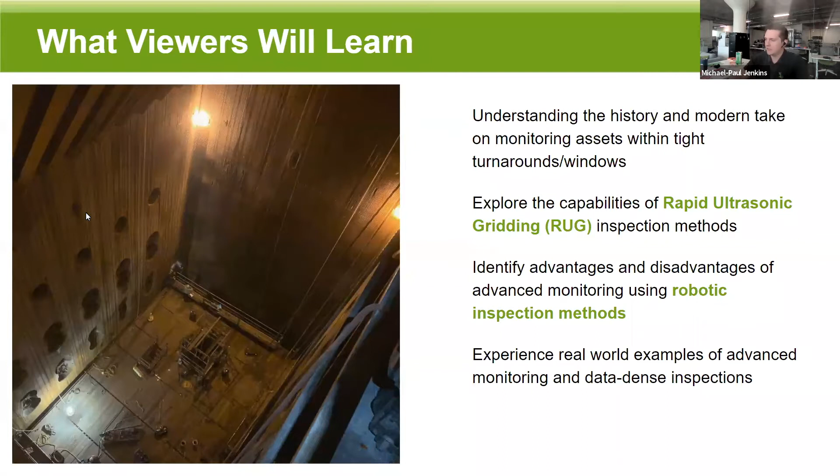But as Sam mentioned, I have a little bit of a logistics background, and to take this time to ask the audience for a history lesson, if anyone was around when this car was around. It was a 1970s Toyota Corona, and that is the real name. I had to look it up. But the 70s played a pivotal role in the history of trade, shipping, and manufacturing. In this decade, Toyota revolutionized the manufacturing world with the wide adoption of its just-in-time, or JIT, production planning process.

In essence, that represents operating with low inventory levels, where raw materials, goods, or even labor are scheduled to arrive or be replenished exactly when or shortly before they are needed in production. Having this system, Toyota could solve some of their problems associated with keeping high inventory levels, free up a significant amount of capital, and reduce operating costs. It could also minimize storage, service, maintenance, and inventory risk costs as well.

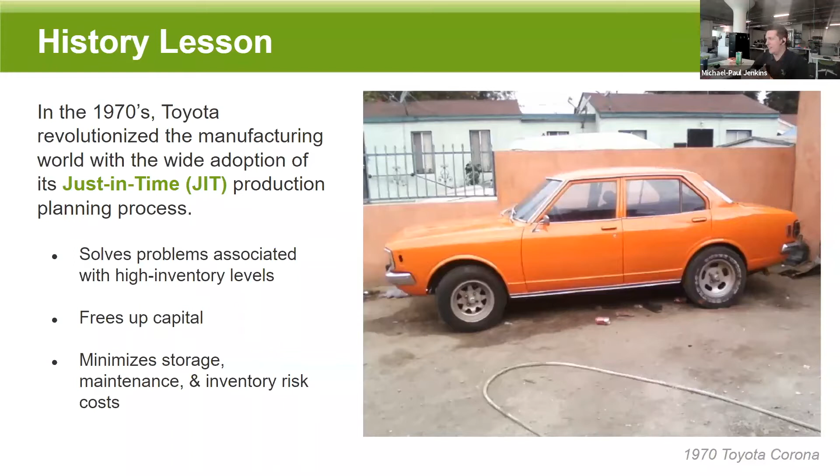You're probably wondering what JIT has to do with NDT or inspection procedures. And in reality, what we're trying to talk about is changing the way inspections are taking place. As technology evolves, procedures and processes need to evolve as well. And so the overlap is, whether it's overproduction, the inventory waste of keeping dead stock, the time spent by workers. You have multiple parallels between the two, where Toyota wanted to make an immediate impact in the market in the United States. They had to adjust their business plan.

And so having robotic inspections, having different types of technologies introduced into the way you all do inspections helps open up new opportunities to save capital, to bend that O&M curve. Something that we hear over and over again is, how do we limit O&M and how do we get back online faster?

So the problem: everyone knows there are known failures, whether it's general thinning or localized corrosion. It's not necessarily uniform. It's sometimes tough to predict or find. Erosion is a rapid deterioration and loss of life expectancy. And some of these vessels, like this scrubber right here, are a massive search area. Thankfully, there are user groups to help identify those known issues, but there still are some unknowns. And major outages in the power industry are going from every year to every 18 months, every 3 years, even some 6-year major outages. So doing this work in a short amount of time often requires a lot of contractors to be on site or cutting scope in order to fit the timing.

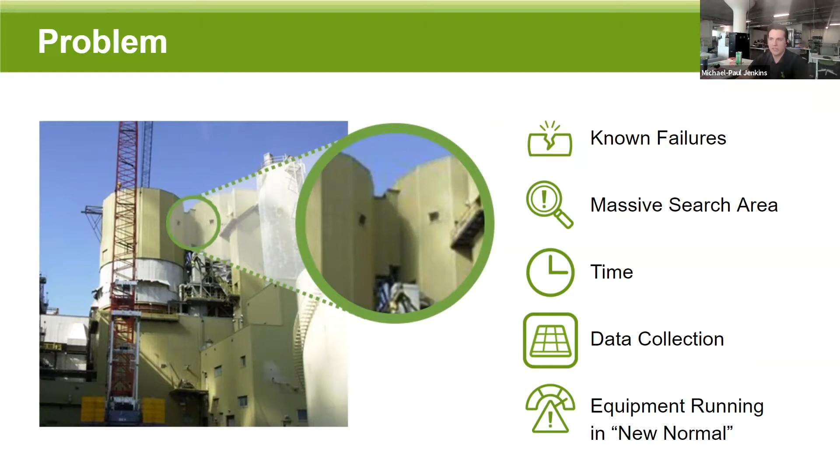Rope access does reduce the need for scaffolding. It's a great resource to send someone down there, get eyes on, feel it, get a little bit of data. The brave men and women that do that, I myself am not one of them. But when you run those spot checks, how do you repeat that? You might have a different operator in the next time. Repeating that is really important, and that's kind of where these technologies come into play.

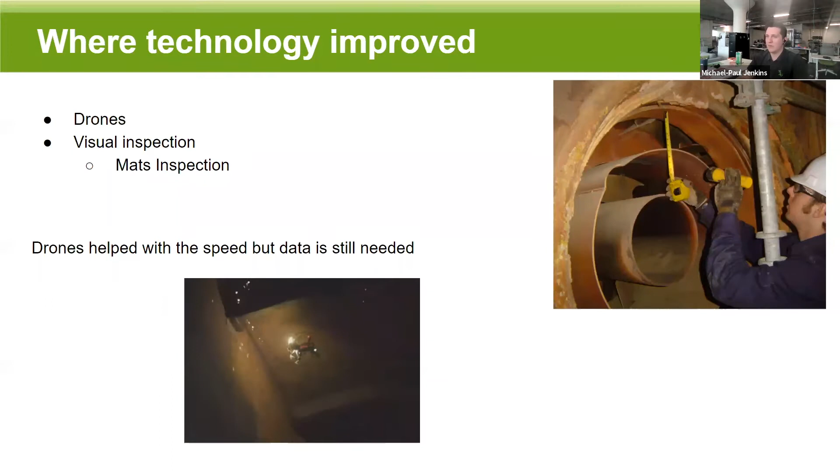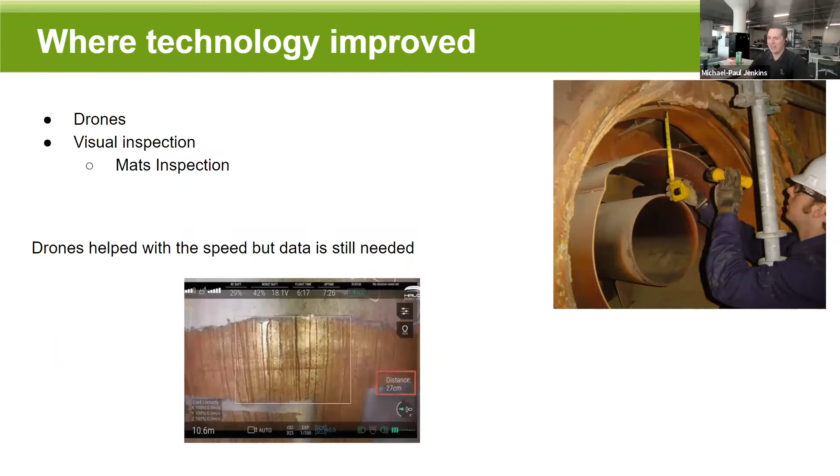Currently, the big hot topic that we come across is drones. So it's a great application for visual inspections. In the power industry, a lot of times you'll have a forced outage, you'll go up and you'll check some superheats, you'll go out there and do maybe a mats inspection. They help with that speed. I myself have seen it firsthand, amazing tools and technology, but sometimes you really need that data. And so that's kind of where the robotic side comes into play.

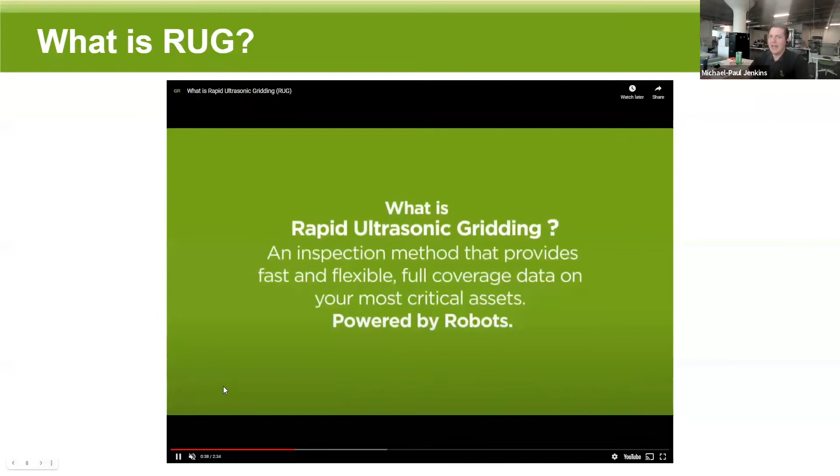For those of you who have not seen these videos in the past, this is just going to go a real highlight of rapid ultrasonic gridding, like I said, RUG. So the traditional methods sometimes can be slow, can be dangerous. Getting what you need in the window you have is a problem sometimes. Scaffolding is a cost associated with that, usually a large cost, and the data that you're provided is usually low in density.

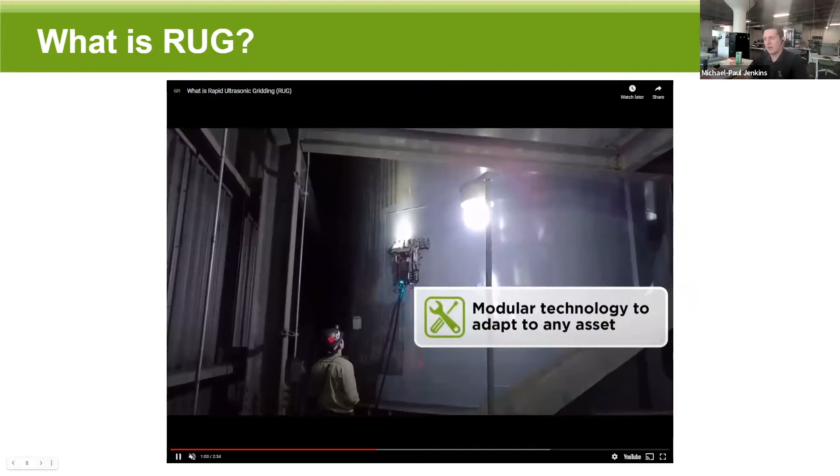RUG basically can do most inspections in one shift, whether it be cones, spheres, tanks in general. And with that comes 2 individuals, 2 NDT techs, and 1 robot. Depending on the setup, you can have little to no scaffolding as well. And you're talking about 1,000 times more data that can be recorded and reviewed down the road. So as I said, 10 times faster, 1,000 times more data.

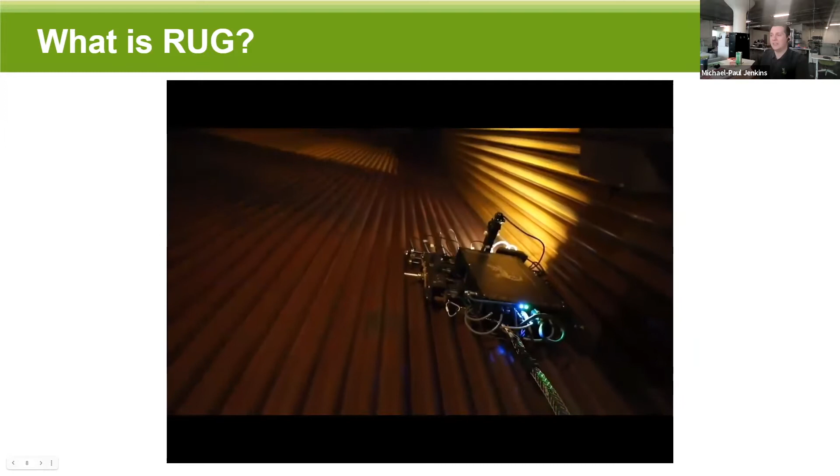Here's some examples of assets we've inspected to give you a little bit of sense of timing. Rapid gives you an idea of the speed. And for those who would be interested in non-confined space entry inspections as well, those technologies are out there, not just with Gecko, but other companies as well.

So again, let's talk about rapid ultrasonic gridding. Like other UT methods, RUG captures that raw A-scan data, which could be presented in a B-scan or a C-scan mode, or used to create a visual representation in those 3D models. However, RUG is capable of capturing multiple A-scan data points at a much faster rate than those traditional thickness measuring techniques. As such, the speed of the coverage is greatly increased over methods utilizing a single thickness probe. The spacing between those probes and the frequency of recording varies depending on the amount of thickness data that's needed.

And I threw a lot of terms out there: A-scan, B-scan, C-scan. There's probably other scans out there too. A-scan, think of it as a signature of sound, right? A thickness value associated with that. B-scan is viewing those A-scans across the run or distance. So in this visual off to my right, this is the B-scan that comes with the inspection. You can see as we go to the right, thicknesses come down, dip down, come back up.

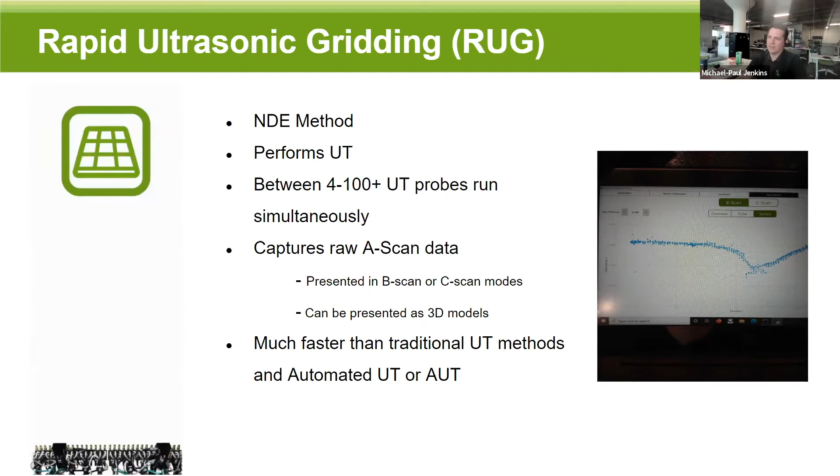So right there, the operators know that there's a potential issue, and you can either go back and validate that by hand, or you can validate that back in the office and give you the final C-scan report, which is what you would see with the robot on the left. But all that goes through a 3-step validation process. So there's ASNT level 2s, level 3s, procedures are written.

Robots, while they're useful, reliable, and safe, they still need humans to operate and maintain, from calibrating transducers, validating those readings, as well as writing those reports. The robots are a tool. Granted, they're a really impressive and helpful tool, but still a tool. You can buy some tools.

You can also rent these tools, lease them, or you can hire a service company to use their tools, something like Gecko. While it would be nice to just throw the robot on your boiler, tank, silo, pressure vessel, and come back a few hours later, kind of like a Roomba, you still need good operations teams.

And to talk a little bit more about these pictures, being able to see these A-scans live, being able to audit them, go back and look for context, and then when the data team uploads that, having an interactive approach, a portal, to go in and look a little bit more instead of just a written report.

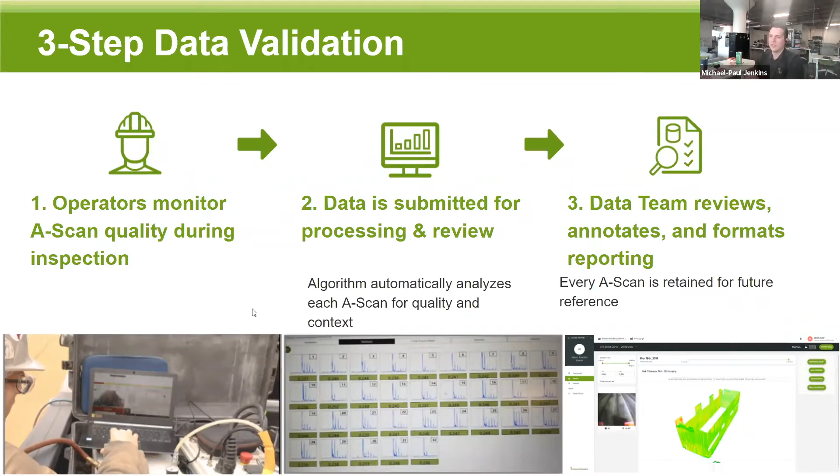So let's talk about those advantages as well. Whether it's delta mapping, fast, adaptable, it gives you peace of mind and less access. Like the cams when you're talking about delta mapping, cams on a scrubber, something that is repeatable. Going back and knowing this object, providing a thickness measurement, something that is going to be reliable and go back

and forth. But you can also do certain things like different assets where in a scrubber, like one of the pictures I showed before, you already know the areas that you should look for, right? That spray zone. So circumferential runs with the robot help find that. Think about how you're inspecting now. Are you able to lay over that data from inspection to inspection that is accurate within a few centimeters? Maybe that's not important, maybe that is important, but are you able to do that in a fast turnaround, right?

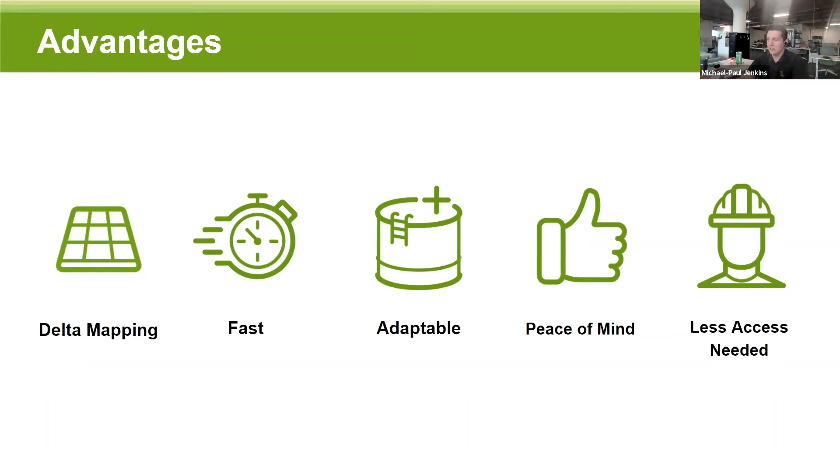The other things to consider are obviously the cleaning that we talked about earlier, the schedules and the budgets. Maybe I can't fit it during this outage, but maybe I'll be offline for a few days. Talk about the cleaning and how we can incorporate technologies. There are companies out there that can do tank inspections, tank cleaning with no human entry, just a robot in there. Not all cleaning companies are created equally, too. There are technologies, different investments in those cleaning spaces that really separate the companies and provide a better service.

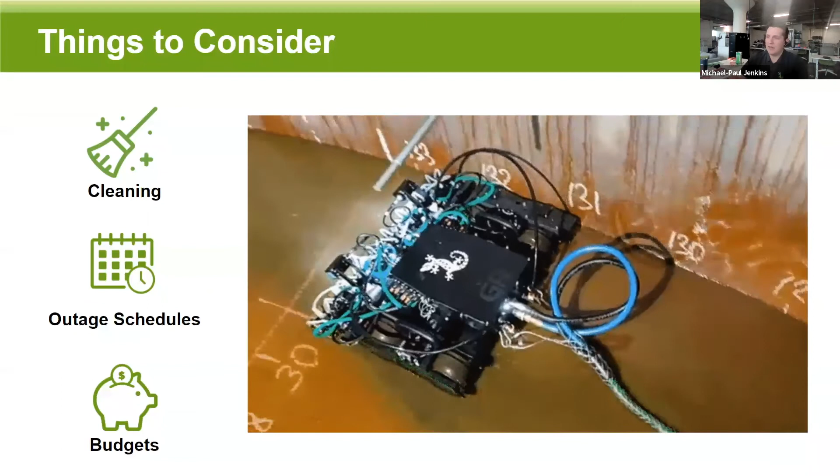Now we're gonna get to the fun stuff, the actual real world examples. We worked on a circulating dry scrubber up in Wyoming, and the customer came to us and said, hey, we know about these concerns. Don't really want to spend a lot of money scaffolding it. And even if so, there's a lot of things to be concerned about where maybe more data density is needed. The problem is we only have a few days to do this. So we worked with them, tried to figure out the best time for when they could come offline, gave them the information for cleaning. And they said, hey, just go in there for 3 days. That's the time we can give you and get as much as possible.

And so we said, hey, we probably could do that with 2 inspectors and 1 robot, and got it done in 3 days. Identified those areas of concern, gave them an idea of where they needed to be at in 5 years and 10 years, and got some feedback from the customer as well. Cleanliness is always a big issue when you're talking about UT, and there were those expectations on how clean it needed to be. But we worked through it and helped them, and we were able to work through getting from the cone to the shell. So letting them know that, hey, there's probably going to be a little bit of access needed. This is where we're going to need to get that.

Maybe your scaffolders can come overnight. And so normally it would probably have taken 2 weeks to do this inspection from the feedback that we got. And to be able to do that in just a few shifts really saved them a lot of time and money.

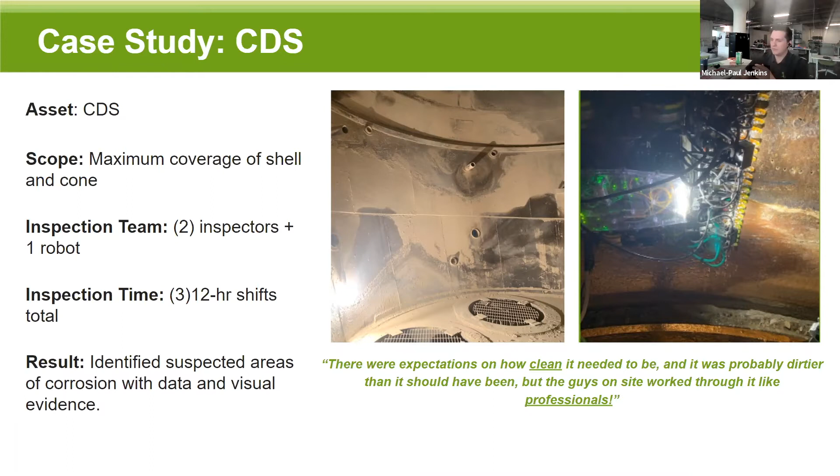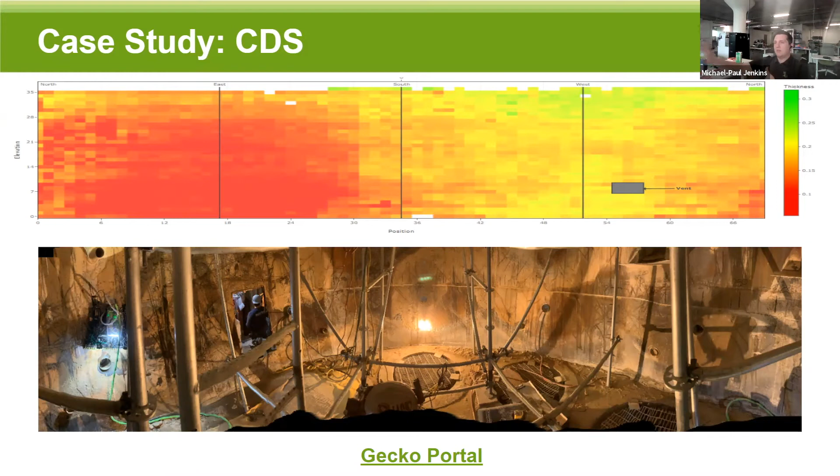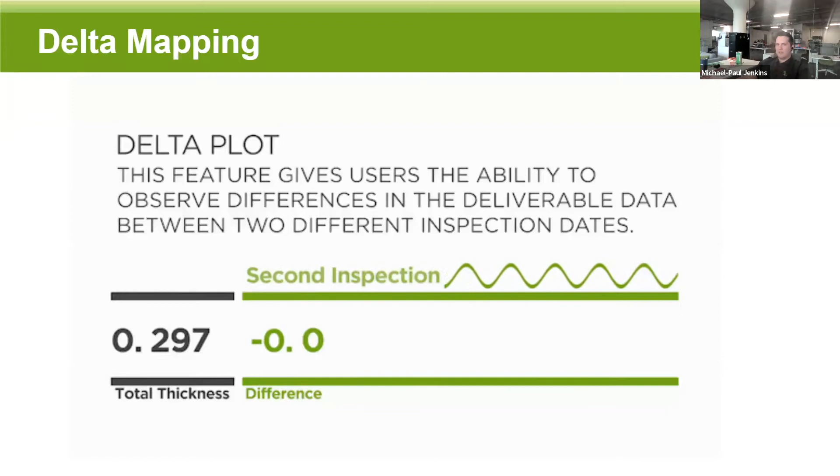This is a little bit more in depth on the delta mapping. This is something that's really important: being able to go back from a first inspection to the next inspection and really monitor those vessels over time in a way that's going to give you the speed and the data that you're looking for.

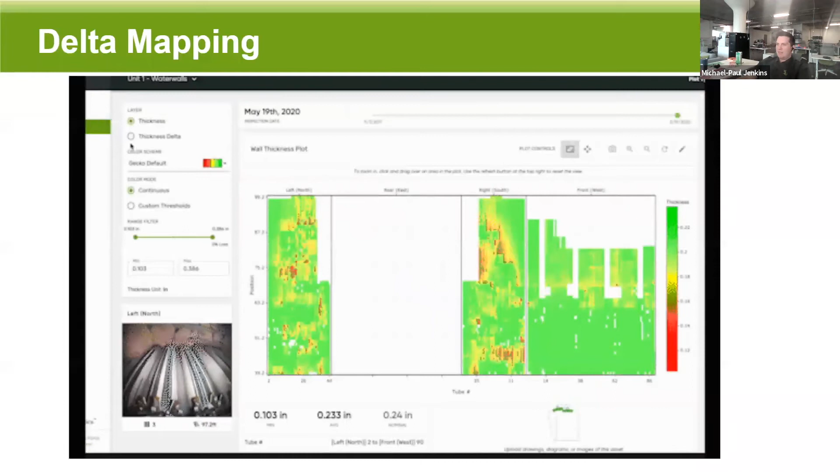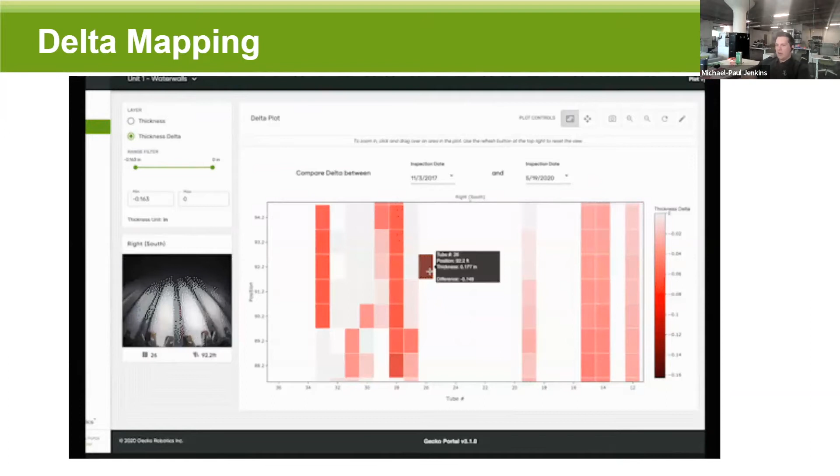And so, as you can see in this, we did an inspection in 2017, came back, did it in 2020. And when you click on that cell, you know exactly what that wall loss looks like, because of that encoder on the robot and those start points, you're accurate within literally centimeters.

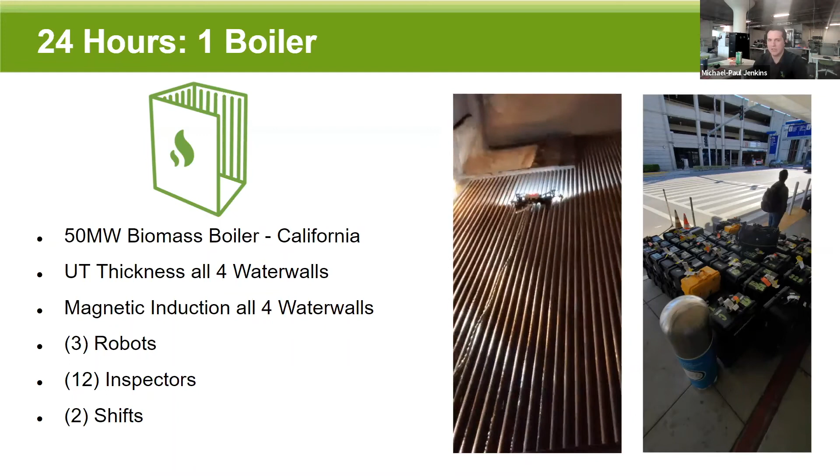For those of you in the boiler industry, I want to highlight some of the advantages of what the robotic inspections can do. So this is a 50 megawatt biomass boiler out in California. They came to us wanting to do UT thickness on all 4 water walls, as well as magnetic induction on all 4 water walls, because there was a lot of metal spray on these boiler tubes, and as a CFB, they're highly prone to erosion.

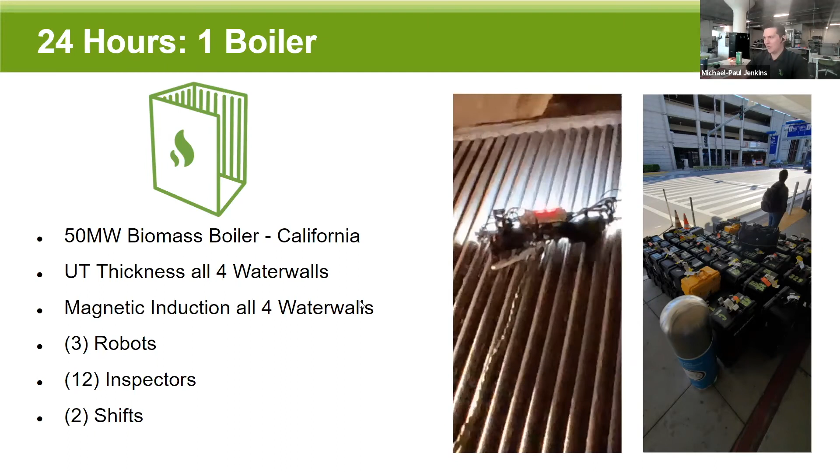And so they came to us, we said we could probably do this with 3 robots, 12 inspectors, 2 shifts working through the night, so being able to get this done in one day. And as you can see on the right, I took this picture when I went out on the job, about $4,000 worth of shipping of Pelican cases, but much to the customer's delight.

We were able to get in there and not only, oh, and I think my thing froze. All right, yeah, there it is.

So get them the information they need and come back and improve that reliability. The issue was that the current outage schedule is already set. Literally every hour of every day was accounted for, and there was a lot of shuffling that was needed. And we're talking about a 10-day outage.

However, they needed to control their spending, and in order to do so, Gecko was able to provide them with a working plan, not just for this year, but years to come. This scan was identified for them to plan better, understand variance in their fuel, take control of the metal spray application, make that 5-year plan, and then to bring us back in the future to help with that Delta map inspection. So we're preventing tube leaks in general, curbing their spend on NDT and maintenance, as well as forced outages.

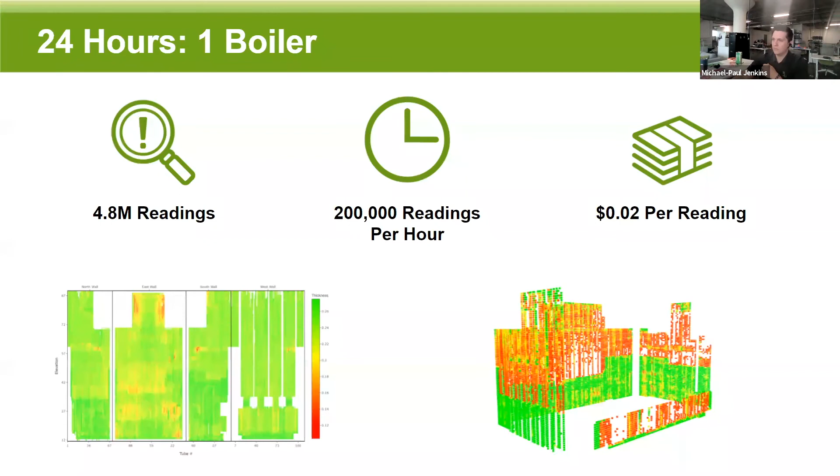This is a fun one too. This is about shifting on a dime. Basically, there was a refinery down south that was doing AUT, and they found some initial readings that caused them concern. Thought they would have to derate this tank. In order to finish this inspection, it was probably going to take another week. However, they called Gecko. It was July 4th weekend, and we were able to get out there in about 8 hours and take about a shift to inspect this.

And to give you size, we're talking about 80 foot in diameter, 40 feet tall. Being able to push the lifespan of that tank back 5 years and get it online in time was very valuable for them, and an appreciative customer as well.

So with AUT, and I'll have a slide to show about that a little bit more, you're talking about really good data density, but there's a time associated with that to get that density. So you have to ask yourself, what's my level of concern with this? How much data do I really need?

There's technologies out there that will give you great density, but it's going to take a while and it could be costly. There's obviously inspection techniques that aren't going to take as long, but the data is lacking. Finding that middle ground that works for not just the customer, but for everyone involved is where some of these technologies come into play.

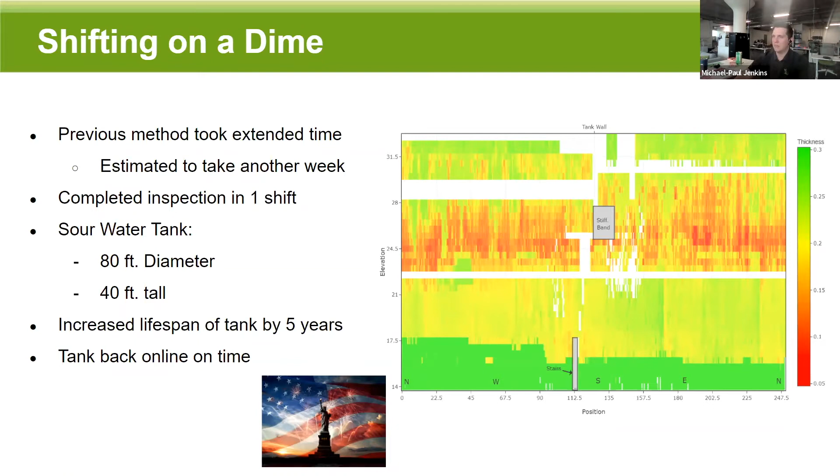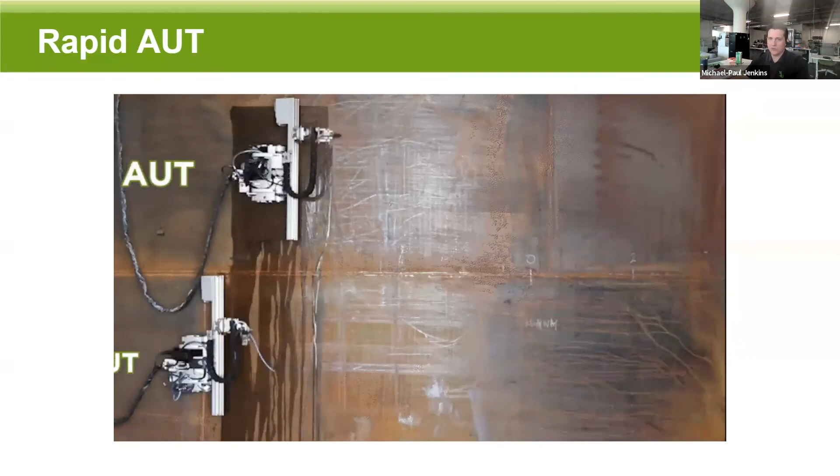So now the fun stuff as well. Rapid AUT, conventional AUT. For those of you who are not familiar with AUT, it's highly accurate data and an important tool for implementing risk-based inspection programs, fitness for service analysis, and remaining useful life programs. These advanced NDT techniques are also widely used in capital projects, turnaround, schedule planning, and shutdown outage projects.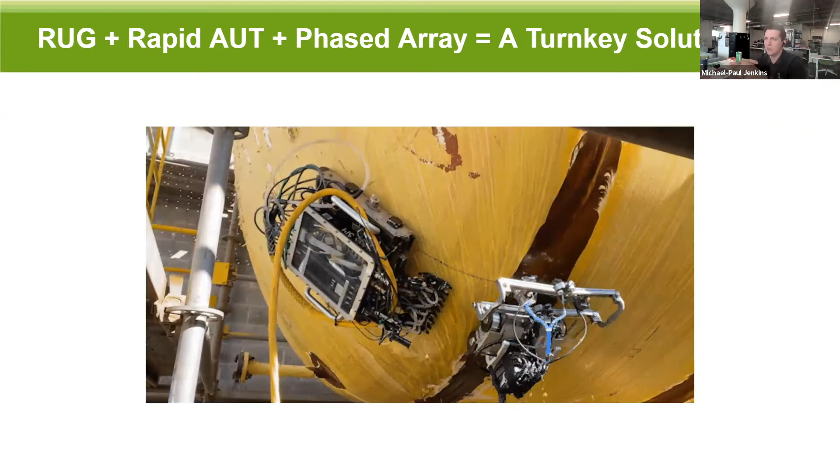And you can pair RUG with other technologies. So this is a case of a pressure vessel where we use RUG, rapid AUT, and phased array. For that turnkey solution, being able to do an external inspection as opposed to an internal inspection was safer, and there was less access needed as well.

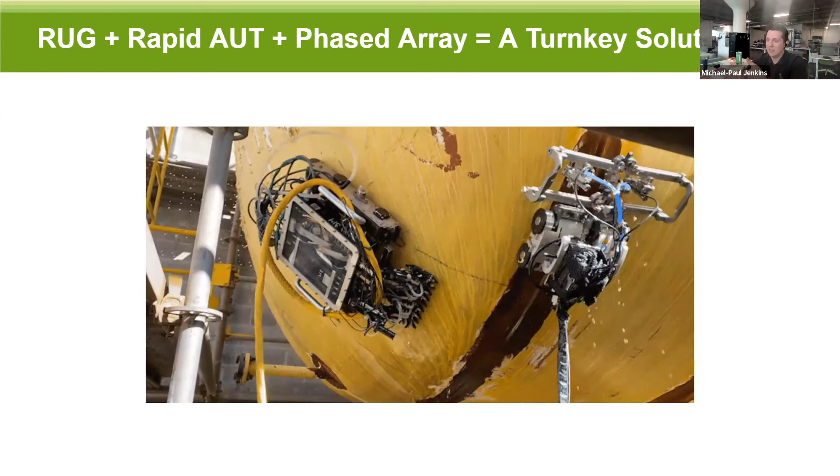So other resources for these types of technologies: obviously a company like Gecko is going to have a lot of this information, not just on RUG, but some of the partners that we work with, as well as Inspectioneering. I know I saw some of the attendees on this list. I'm sure you use this website a lot. It's a great resource, not only for people like myself, but I try to share this with as many customers as I come across. I like to think of it as the Wikipedia of NDE. It's very helpful, and they have a journal, still a hard copy journal, that I like to read every time we get it. I think it's once a month, if I remember correctly, or maybe once a quarter.

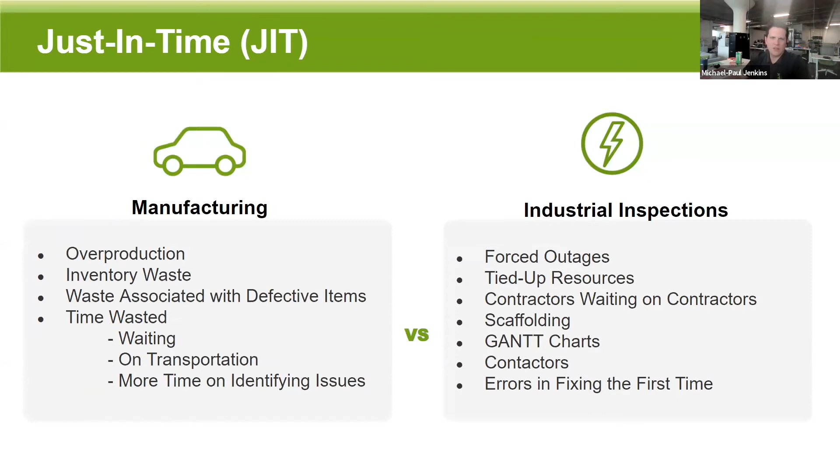But I can show you a little bit more examples if we want to go back to the previous slide. So when you're working with UT, obviously, if there's any rust or anything that's peeling off like paint, you're going to lose sound through that. But for the level of cleanliness, maybe it helps if there's a particular asset you had in mind. Rick, do you have a particular asset in mind?

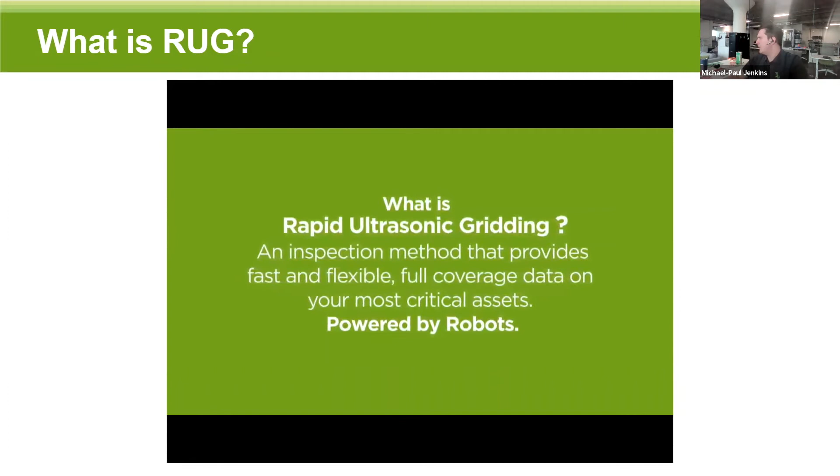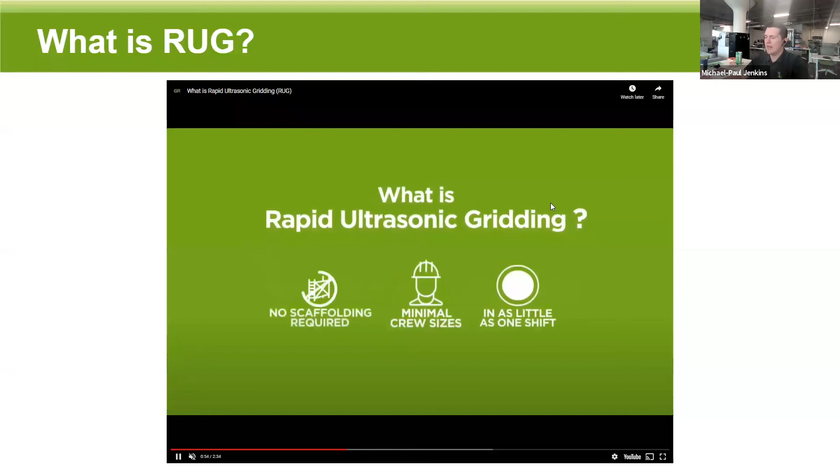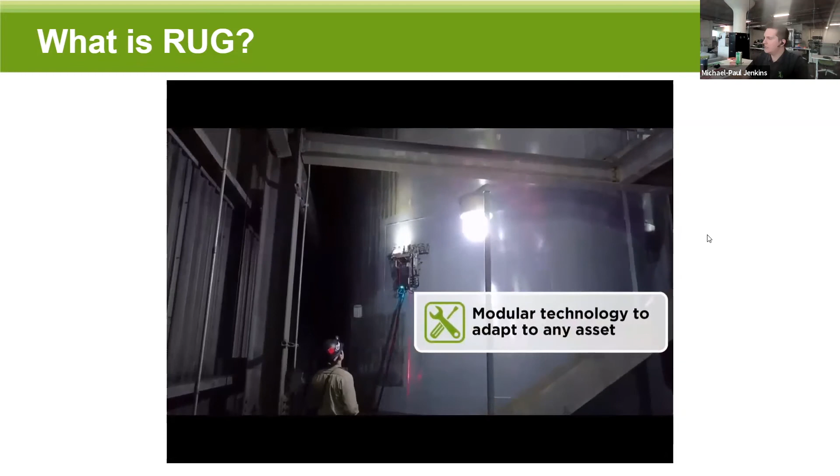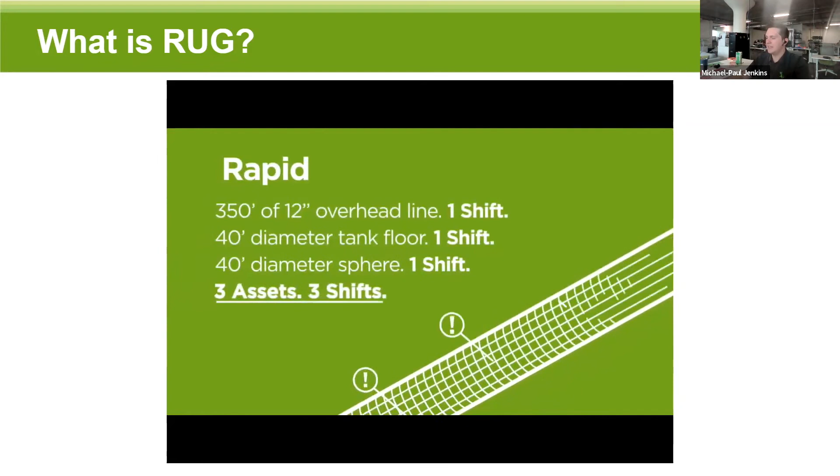How about this, Rick? I will find the examples of the cleaning and we can connect to share that. But basically, if we're talking about a boiler, in many cases, high pressure water wash, talking about 10,000 PSI, 250 gallons per minute. Those whirlybirds that drop down, those are clean enough for us. Tank floor, a little bit different. Quinn, if you want to add any of your experience on the cleaning side in the oil and gas industry, feel free to do so. But yeah, it needs to be clean if you want to get the most out of the data.

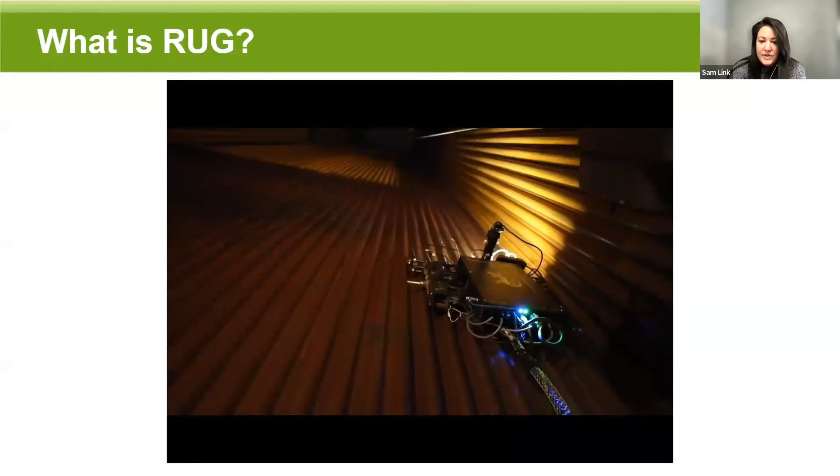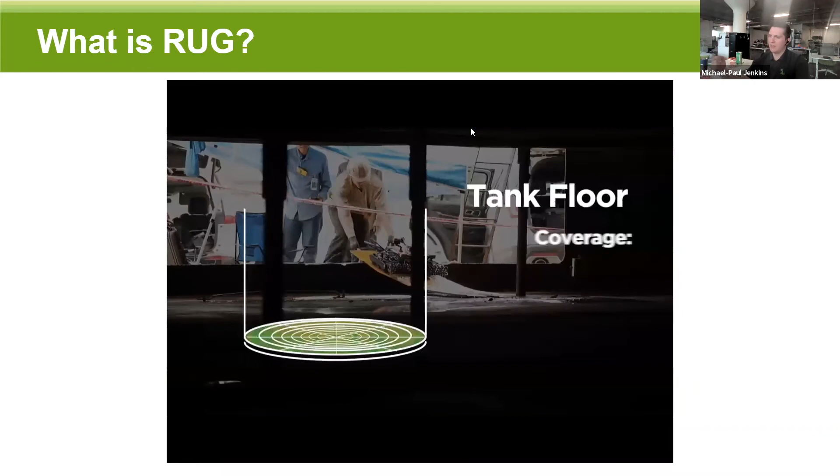Awesome. Can you talk a little bit more about the delta mapping and reproducibility? Is this an advantage that every rapid ultrasonic gridding inspection gets? Yeah, so if you're talking about a boiler or a tank, we have our standard operating procedures or a scan plan where we'll start at the same known elevation or the same known, call it a manway. And we're able to do that repeatably because of that encoder, or in some cases where we're doing non-confined space entries, we have an automatic tracking system on there, like on the video, so we're able to know exactly where we are. And so being able to go around and delta map that is part of every RUG inspection, as long as we've inspected it in the past.

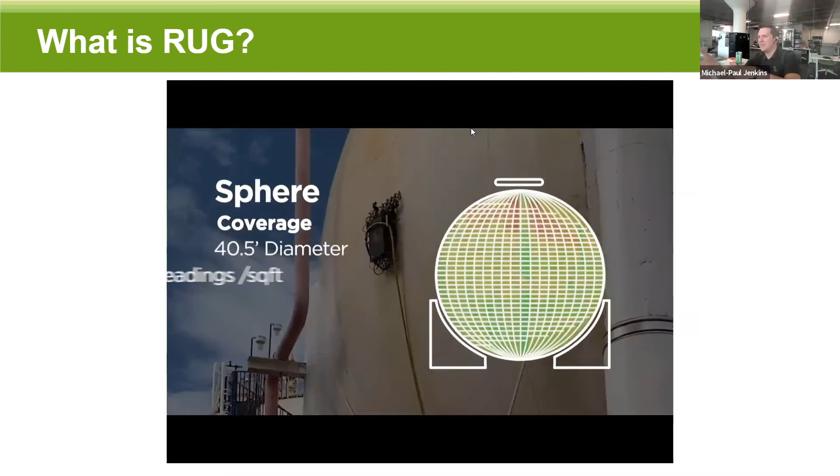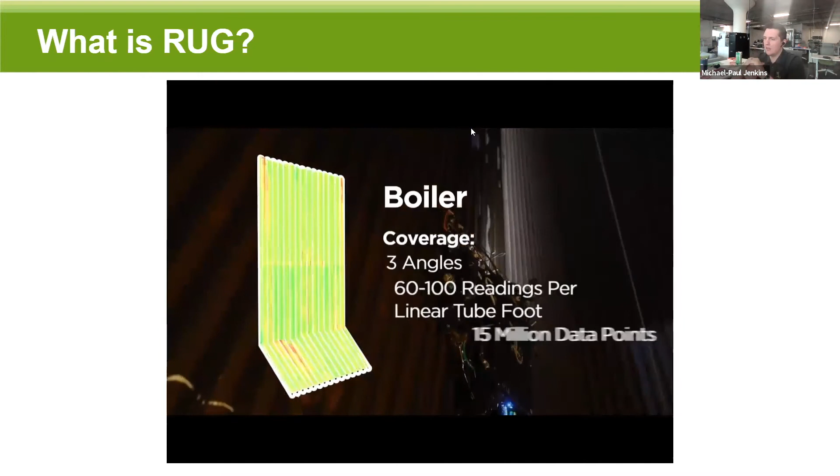Now, you're more than welcome to use data from previous inspections, go onto our portal and try to put those previous inspection thickness measurements in there yourself, use our information and the previous inspection companies', and try to figure out if that matches up. However, because of our procedures, any type of inspection that we do has the ability to do that delta map to go back and forth. So talking to a utility where we did a boiler inspection 4 or 5 years ago, I checked with our data team, and yes, we can absolutely do it.

Awesome. And then looks like Rick is wondering about the cleaning for boilers, condensers, industrial heat exchangers, etc. Yeah, Rick, if you sign up with your email, I actually have a perfect document I can share with you for that. That'll give you a real highlight overview of the level of cleaning that we require.

Awesome. Can you talk a little bit about Gecko's involvement in formulating the actual inspection plan for customers? How do you go about understanding their expectations and needs? Yeah, that's a great question. And as someone who started in this industry 3 years ago, I wish I would have known what I know now. And that really takes a deep dive, right? You don't need to do 100% inspections of your vessels unless 100% is needed. So you really need to understand the customer's needs, wants, working within their budget, working within their time, and being able to formulate that plan.

We're never going to mislead or lie to you. We're going to tell you what we can do, what our limitations are, and figure out what works for you. So one of the things that we've really invested in is bringing industry vets who have been doing this for years, pairing their brains with the technology that we can build, and talk about not only formulating an inspection plan, but an action plan going off of that, taking that data, taking the speed, working with other vendors from cleaning to inspection to repair companies and pairing that all together.